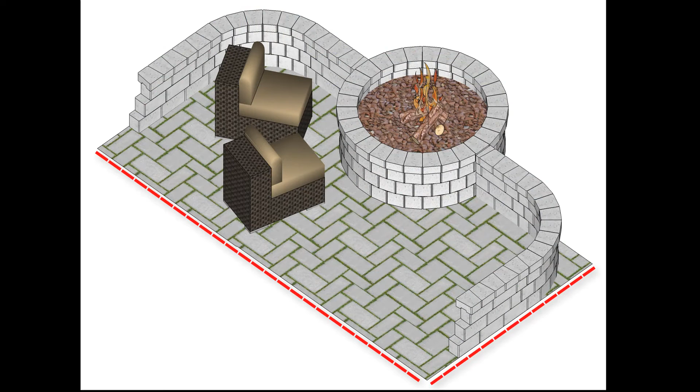AB Courtyard Patio Package, Chianti. This patio package will fit on a 12 by 19 patio. These basic instructions can be modified to fit a different patio size.

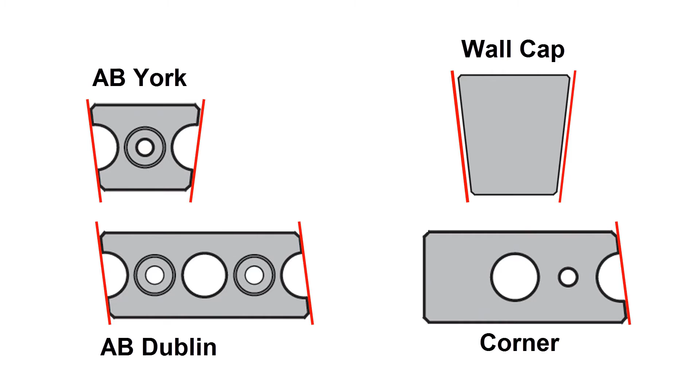This layout will use the following blocks. The blocks are modular in size, with 2 AB York blocks equaling 1 AB Dublin block. The blocks come with built-in angles, so during construction, when an AB York, AB Dublin, or a wall cap meets up to a flat surface, some cutting will be required to give a finished look to the project.

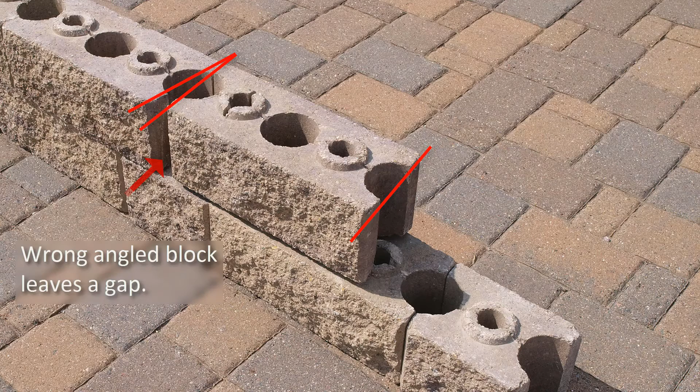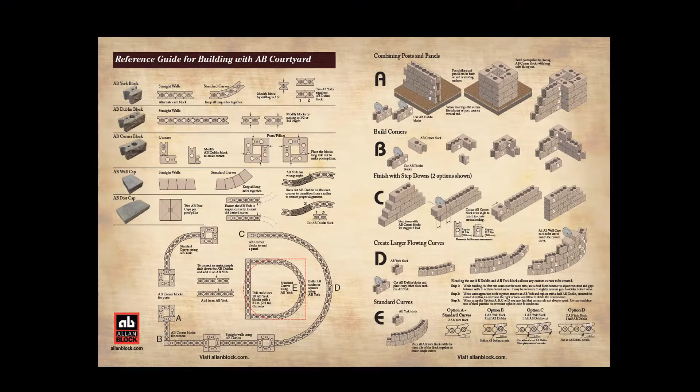During construction, the AB Dublin blocks may be angled the wrong way, leaving a gap. Simply slide the block over and add in an AB York block. For more details on proper construction, see the AB Courtyard Reference Guide.

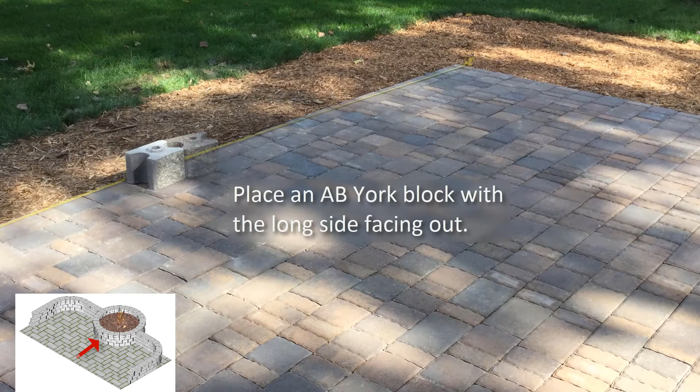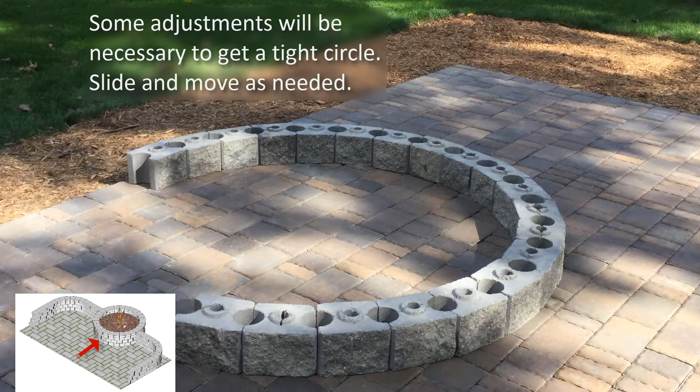To start, locate the center of the back of the patio. Place an AB York block with the longer side of the block so it faces the outside of the circle. Then install additional AB York blocks with the long sides facing out to build the entire circle. Some adjusting and sliding of blocks will be needed to ensure a tight circle is built.

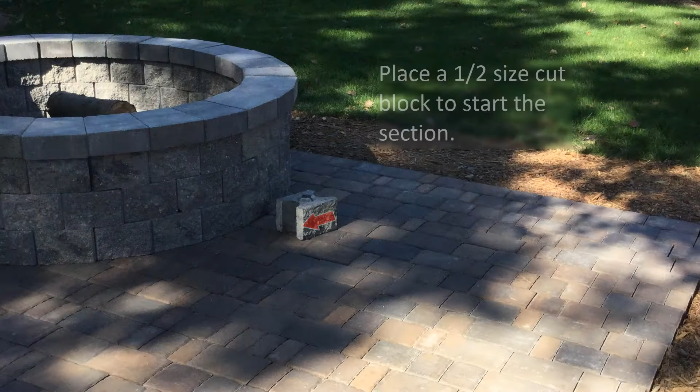Install the next 2 courses of AB York blocks in the same direction over the blocks below. Finish by installing wall caps. To start the wall panel, we will need to use a cut block. This creates a straight edge to the block to place against the circle created by the AB York blocks, giving us a clean, flush look when meeting up with the flat surface.

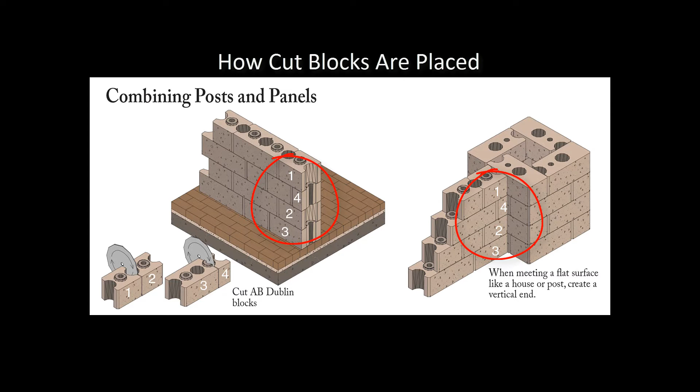For this project, we will be cutting AB Dublin blocks in half, as well as in a 3/4 and 1/4 size. These cut pieces will be used in every course of the wall panels when meeting up with the flat surface. When building the wall panels, installing 2 courses at the same time will help block alignment.

For the first course, use the pre-marked blocks and cut down the center of the block to create 2 1/2 size blocks. Use a saw with a diamond blade and adhere to safety standards. Install the cut block against the center of the circle to start the patio wall. Continue installing AB York blocks to start the curve.

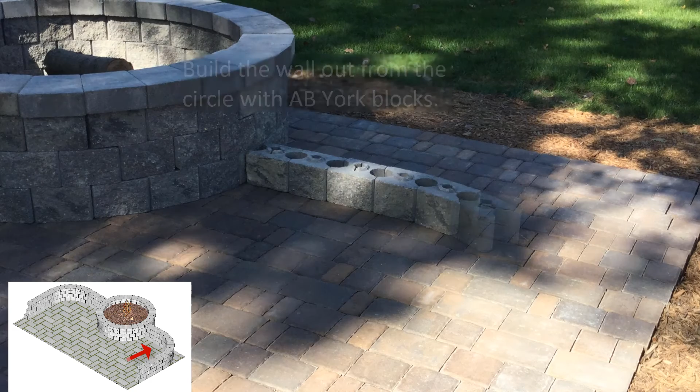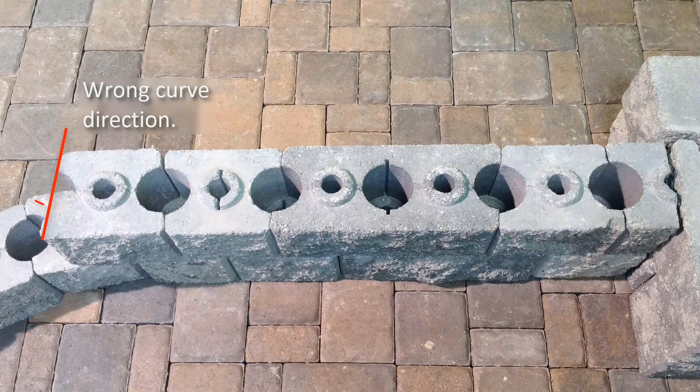At the curved wall section, build the curved wall just like the circle. Place all AB York blocks with the long sides of the block facing the outside of the curve. If the block starting the curve is not angled properly, the direction of the curve will be wrong. To correct this, the initial cut block to start the section will need to be changed.

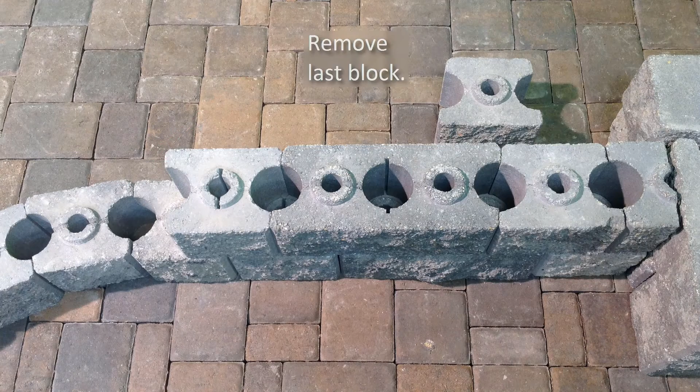Start by removing the last block that has the wrong angle and set aside at the beginning of the section. Then slide all the blocks down 1 block from the start of the section. Remove the initial cut block and then place in the AB York block that was previously set aside. Now reinstall the initial cut block by turning the block over so the raised rings are facing down and the cut side is against the post.

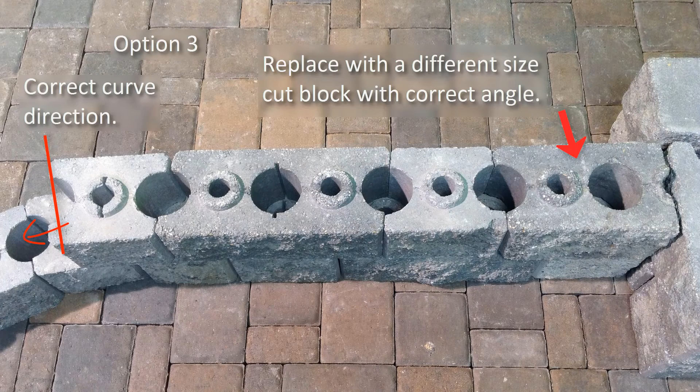A second option would be to replace the initial cut block with the opposite angle cut block. And finally, a third option would be to replace the 1/4 size cut piece and an AB York block with a 3/4 size cut piece that is angled correctly. Once the angle is corrected, install AB York blocks to build the curve.

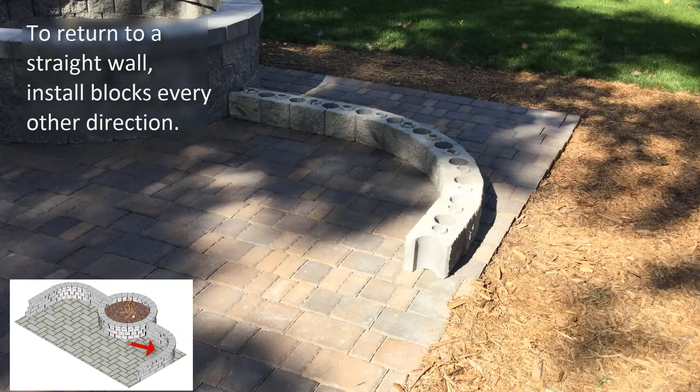At the end of the curve, place an AB York block with the long side facing in to create the start of the straight section. Continue building with AB York and AB Dublin blocks. Then install an AB corner block at the end of the section.

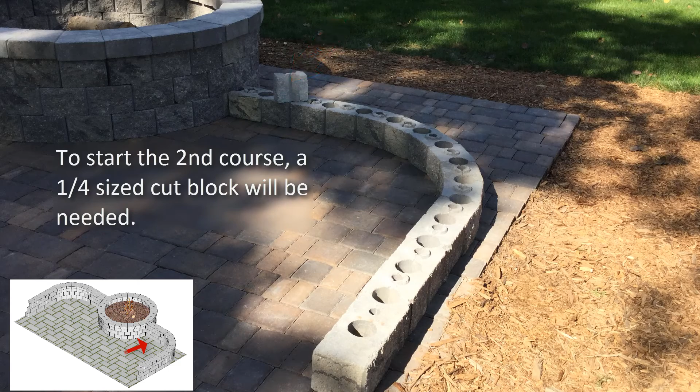To start the second course, cut another AB Dublin block, this time down the raised rings to create 3/4 and a 1/4 size block. This will ensure the blocks line up properly and the seams are offset from the blocks below. Place the cut side against the corner blocks to create a finished look against the circle. Stack AB York blocks to build the second course and the curved wall section.

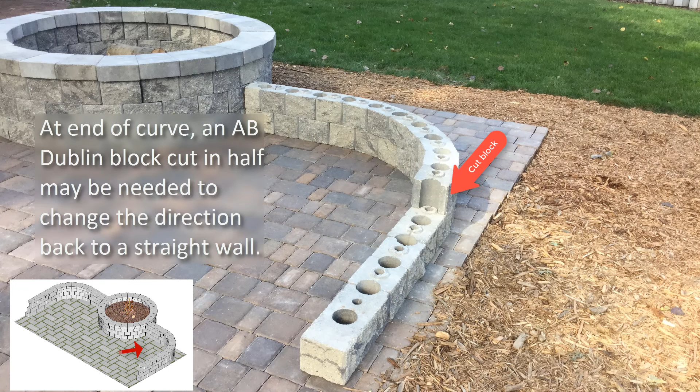Again, if the angle is not correct, make the adjustment in the wall section just built to change the starting angle. At the end of the curve on the second course, an AB Dublin cut in half may be needed to help adjust the angle of the blocks back so a straight wall can continue. Place and adjust as needed to fit. Then continue stacking with AB Yorks to the end of the wall section. Finish with a corner block to create an end that steps back, giving a staggered look with no cutting.

Install the third course of the wall panel just like the first course. Start with a cut block and use all AB Yorks to build the panel and the curve. Finish with wall caps. You can choose to secure them in place with masonry adhesive. With one side done, complete the second half of the project using the same steps.